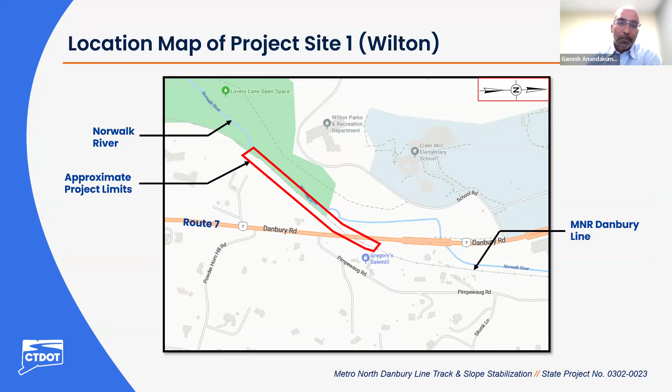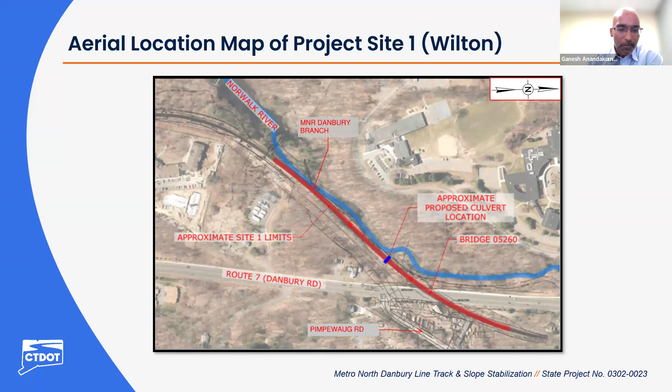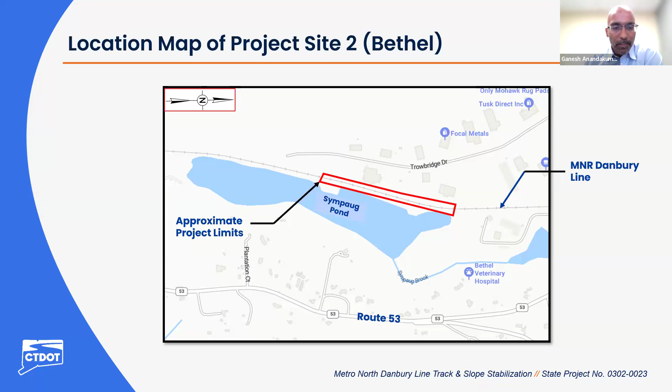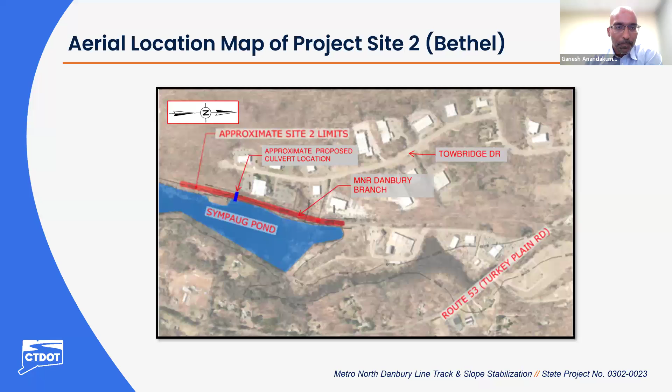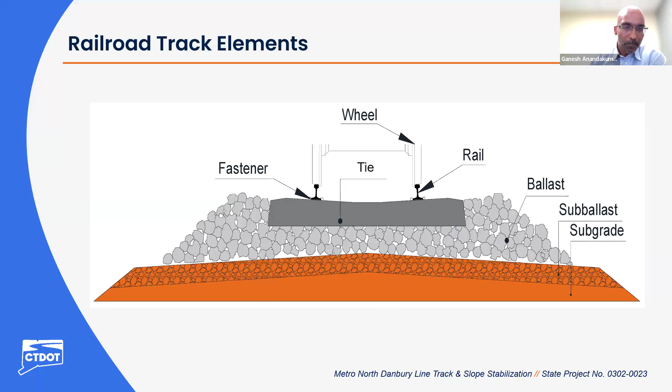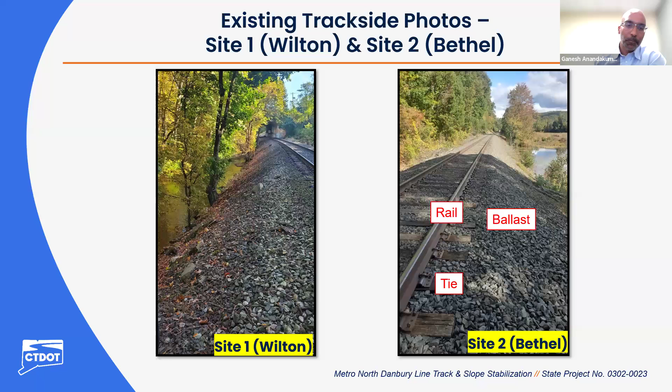Here are a couple of trackside photos taken at the two sites. We have site 1 in Wilton to the left and site 2 in Bethel to the right. Note that these track segments were constructed more than 100 years ago as side hill embankments with steep side slopes. These side embankments lead to frequent maintenance efforts by Metro North, partly due to slope erosion.

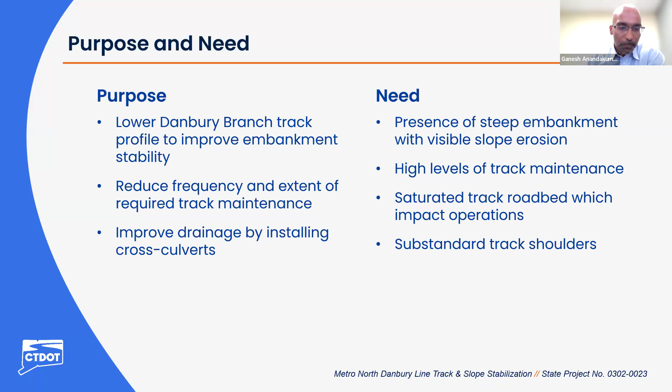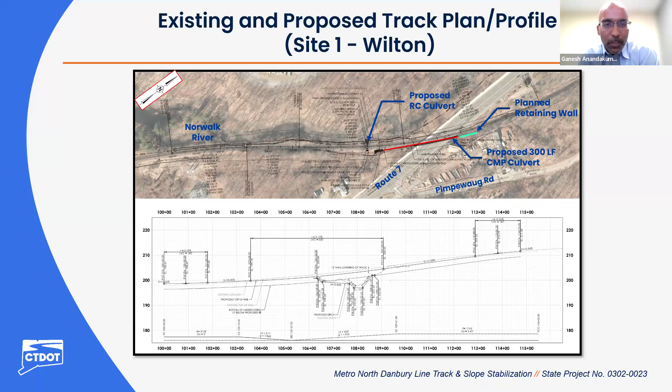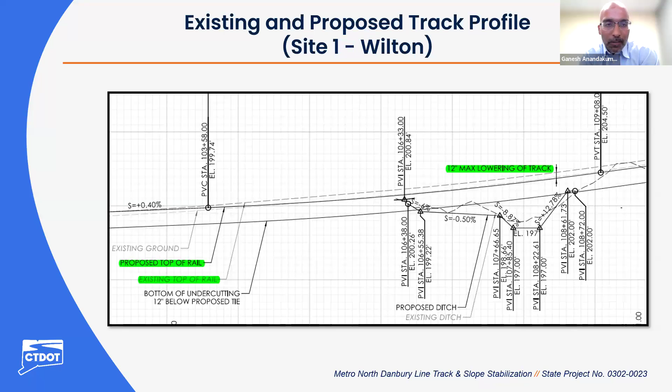This slide indicates a zoomed in profile at site number 1, where we're trying to undercut or reduce the track profile by a maximum of 12 inches. The plot shows the existing profile as dashed lines and the proposed profile as solid line, before and after undercutting.

The same for site number 2 in Bethel. We have the general plan and profile at site number 2 in Bethel, covering about 1,000 feet of the Metro North Danbury line. The location of the proposed reinforced concrete culvert is also shown, which will be used for stormwater drainage.

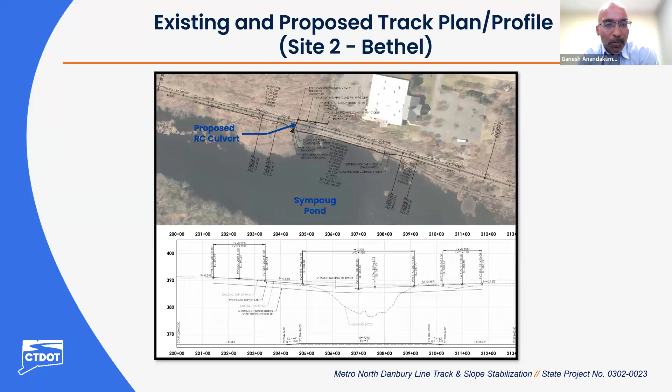This slide shows the zoomed in profile at site number 2 in Bethel, where we're trying to undercut the track profile by a maximum of 12 inches. Again, we are showing the existing profile as dashed line and the proposed profile as solid line.

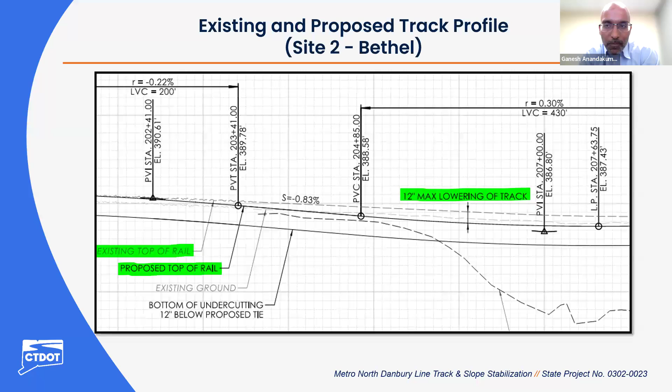The existing and proposed typical section is shown in the slide at both sites. The proposed section consists of a minimum of 1 foot shoulder on either side of the track, 12-inch minimum clean ballast, realigned rails, and realigned timber ties as well.

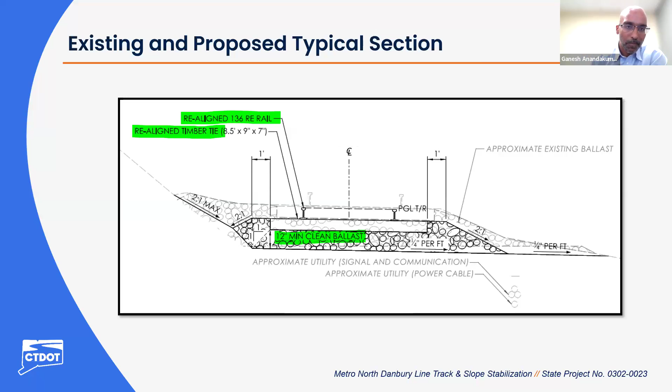To summarize the scope of work at site number 1 in Wilton: we are undercutting the track for about 1,300 feet, thereby improving slope stability, and replacing contaminated ballast below the ties. In terms of drainage improvements, we're improving the track side swale capacity, replacing the cross culvert in approximately the same location as the buried masonry culvert shown in historical records, and also constructing about 100 linear feet of retaining wall adjacent to the track and Route 7 overpass to prevent flooding of the tracks.

There are two photos shown here. The top right photo shows the outlet of the existing stone masonry culvert, and the bottom photo shows the existing swale next to the track and beneath the Route 7 overpass.

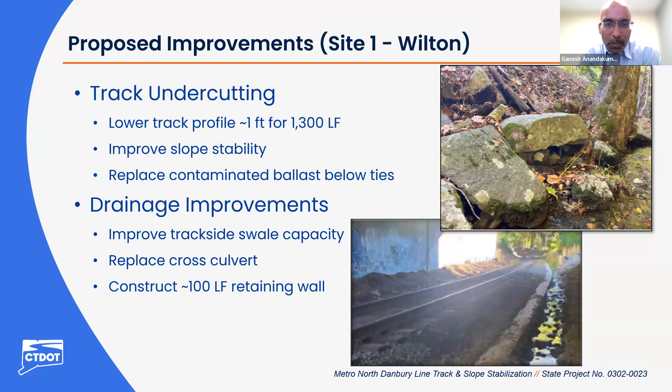To summarize the scope of work at site number 2, we're undercutting the track for about 1,000 linear feet, thereby improving slope stability and replacing contaminated ballast below the ties. In terms of drainage improvements, we are regrading the trackside swales and constructing a cross culvert for drainage purposes. This photo shows the potential outlet for the proposed cross culvert.

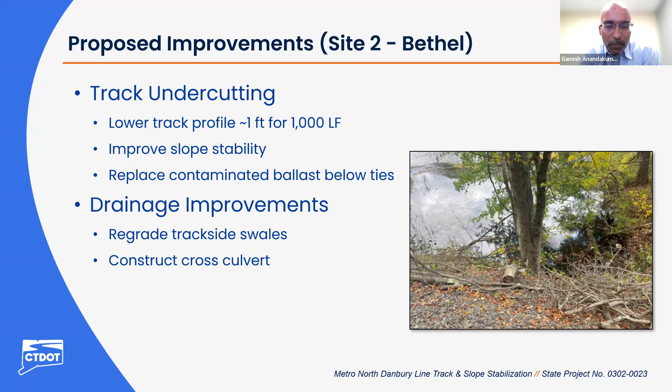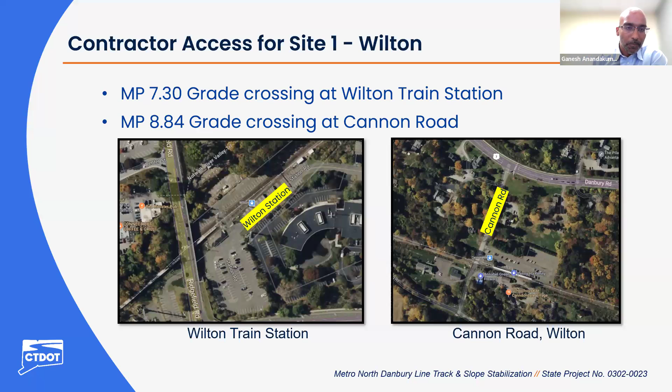At site number 2 in Bethel, we have two contractor access locations: one at mile point 17.19 grade crossing, which is the grade crossing at Long Ridge Road in Redding, and the second at mile point 20.44 at Taylor Avenue in Bethel.

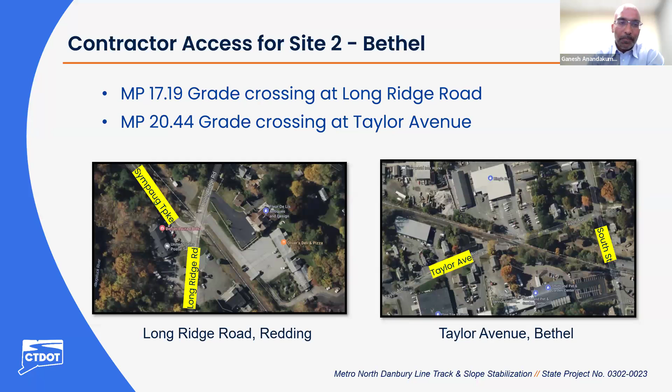Here is some additional project information. There will be no relocation of utilities required. We don't anticipate temporary or permanent property impacts, meaning all the work will be done within the state right of way. However, we will be having impacts to the Danbury Metro North line.

We anticipate the track to be closed over several weekends for the contractor to perform the undercutting at both sites. The installation of cross culverts is expected to occur before the track undercutting. Ahead of the construction work, there will be press releases and notifications on the town websites indicating the weekends over which the track will be closed and how the public can get to and from the Danbury and Norwalk line.